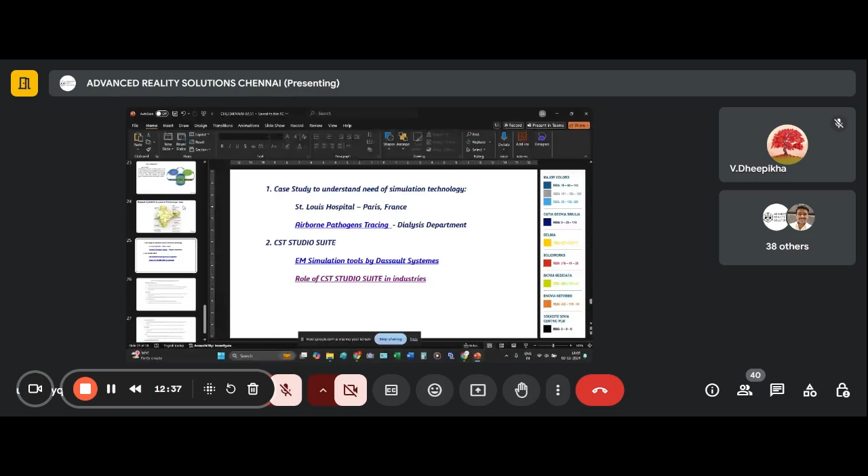Shall we proceed with the session, or shall we wait for some more participants to join? No, sir. We'll begin the session, sir. We'll start. Great, sir. I will share my screen now. Is my screen visible now? Yes, sir. Good to go. Great.

So like the Professor introduced, I am Syed Ibrahim from Advanced Reality Solutions. We work for Dassault Systèmes, which is located in France. The headquarters is in Paris. So this is what we are going to deal with: antenna design and electromagnetic simulations. In particular, we are going to address real world industry demands. It's my pleasure to join, and I will hide this.

Before we get started, let us see what these industrial revolutions are, because as the revolution changes, the technology moves forward to another level. We all have a little bit of knowledge on industrial revolutions: Industry 1.0, 2.0, and 3.0. 3.0 is the period where computers started to play their major part, where we started to have automated production as well as semiconductor electronics.

Industry 4.0 happened after the year 2000. Until 2020, there were numerous improvements in industrial revolution 4.0, where we have heard about lots of cyber systems, internet of things, industrial internet of things, encrypted platforms, cloud services, networking, and machine learning, which is a part of artificial intelligence, I would say, because another part is deep learning.

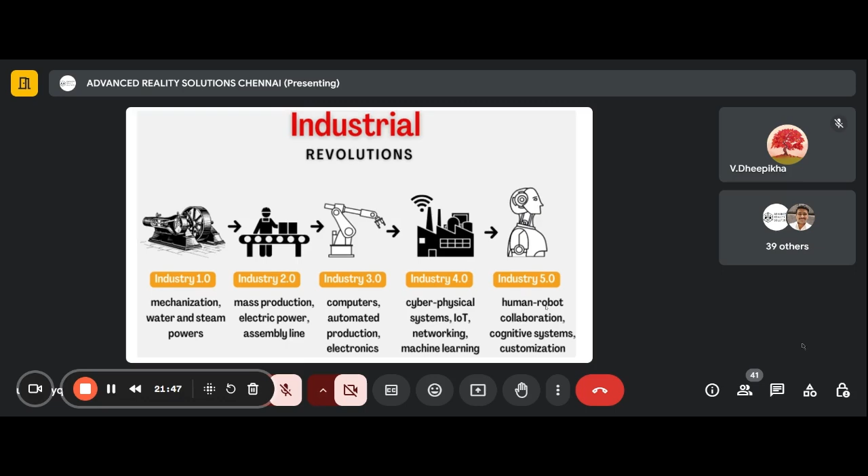5.0 is the collaboration of human and robot for all applications. Take your pick, any application, medical field, defense, production, teaching and learning, everywhere robots are there. So 5.0 is the future being planned by industry professionals, senior scientists, institutes, and senior professors. They are working towards achieving everything in line with the requirements of the Industry 5.0 revolution.

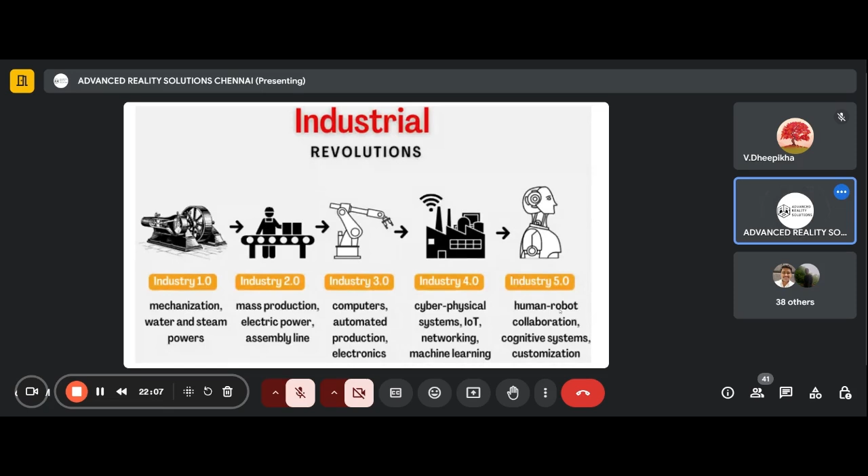It is going to be a short introduction about this company, Dassault Systèmes. Actually, they have numerous industrial clients, but their objective at the moment is to connect with institutions like yours, top-notch institutions, from where they could get people who are really handy with their software tools, because they supply some software to the industries, leading industries. I will show you what the industries are.

This is some basic information about Dassault Systèmes. It is located in Paris, Boston, and Shanghai. These are the headquarters for different parts of the world. They have 72 research and development laboratories and 180 3DS offices, which means the complete setup. You will come to know what is the meaning of this complete. I will show some of the slides so that you can understand.

This is how it has begun. In the year 1981, they started doing 3D designs. In 89, they started doing digital mock-up. And then product life cycle management came in the year 1999, that too for a car manufacturing company. In 2012, they launched the 3D experience platform completely, where you can virtually get into an environment and feel it.

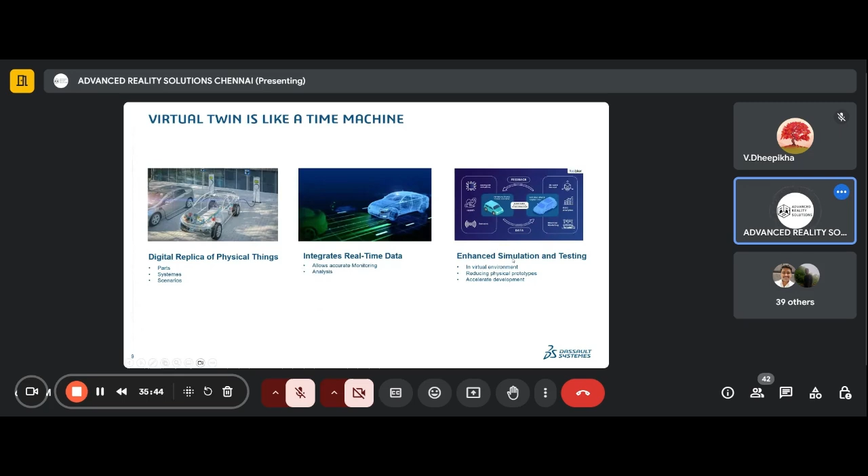Assume that I am designing an amplifier in which the transistor has got burnt. I'm going to replace it with a new one. Again, I will run the product execution. Again, some other part may burn. What is happening here? I am taking new hardware whenever required, which means I'm using the actual resource. So when you check the carbon footprint of such transistor manufacturing, it is some value. So I am avoiding everything. So I am driving sustainable practices by using simulations. That's what the meaning is.

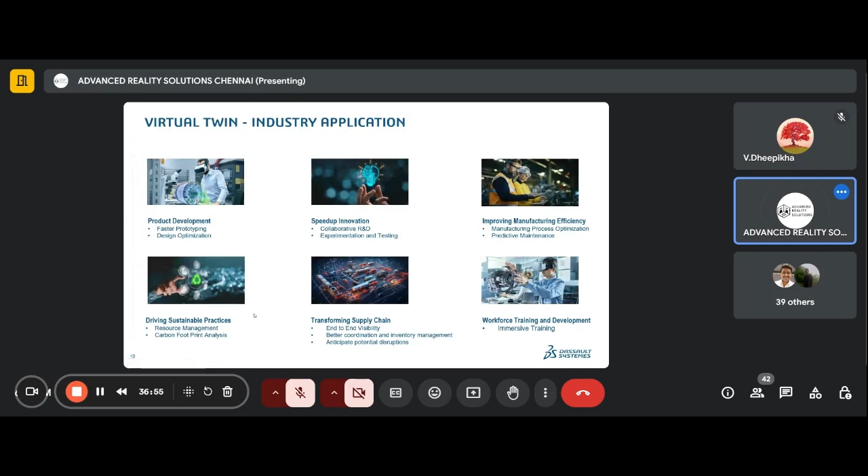How do I approach? Being the students of pre-final year, I hope you guys are from pre-final year or second year, the objective is to work towards your project, because that project will define you. Who are you at the end of 4 years of your program, or 3 years for lateral entries? After the completion of your degree, who are you? The industry will see you based on many aspects. Your project is one among that.

So before you even start working on your project, it doesn't have to be 100% hardware. It can be a simulation experiment also. Or you can make it 50-50 or 70-30. So your idea is important. Have a clear concept. Conceptualize your idea. Justify your idea. You cannot say that I am going to fold the entire electronics department into my pocket. No, it's not possible. When you think about something, you should have a valid justification for that.

You can say that I will design an oscillator which will resonate at so and so frequency, maybe 500 gigahertz, and the cost involved in the entire design is only 10,000 rupees. So this is something like a theoretical approach, but you should justify it. What kind of oscillator are you going to design? What about its biasing? What about its major elements? What about the feedback unit?

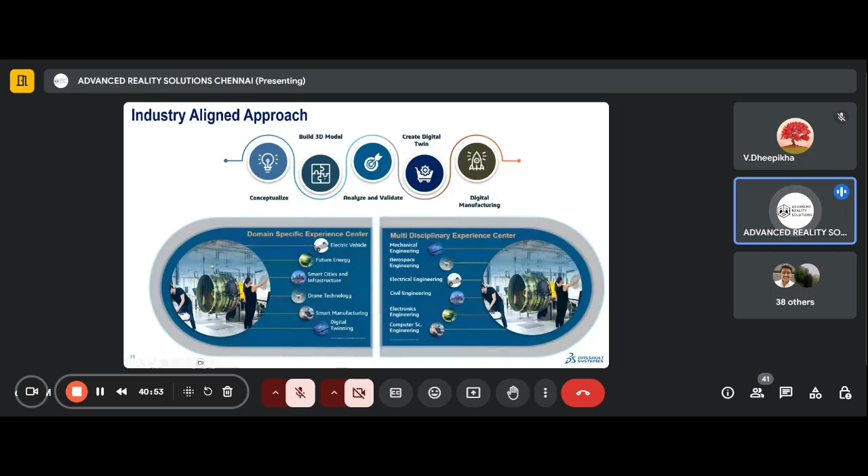Even you can test your product, you can create your product using simulation tools. Before going for hardware, you can have a final product in your computer as a module, like you see some pictures here. This is a 3D view. This is not actually hardware, this is someone else viewing this in 3D.

So what are all the tools available for this kind of process? We can start from the physical design. CATIA for the physical structure. You see the pictures on the right side. Here a PCB is also shown.

Basically, CATIA is a design tool, a computer aided design tool. It is a 3D CAD tool with which you can design all your hardwares. You see, this is for civil engineering, and this is for us electronics people, for automobile students, some other department, instrumentation people, mechanical guy. For all department students, wherever physical structuring is involved, we can use CATIA.

GeoVia is a very useful tool for people who are designing and working on everything related to mines, maybe gold mine, coal mine, whatever. This is even useful in the construction of dams as well. So that is another tool.

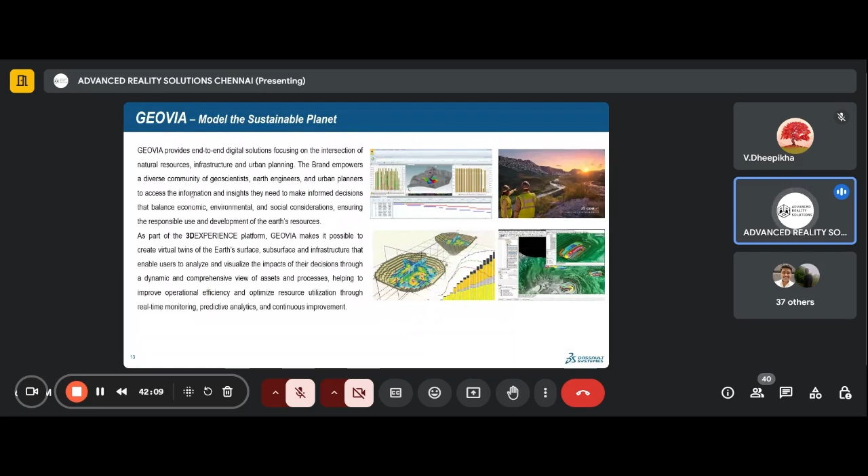Simulia has two divisions. One is Abaqus, the other one is CST Studio Suite. I will explain later, so keep this in mind. The tool that we are going to deal with, CST, is one of the members of this Simulia family. All right, keep this in mind.

Delmia is for, you see, here we talked about digital manufacturing. So Delmia is for digital manufacturing. You can literally bring your industry inside the computer. How is my industry going to be? I'll be having this thing here and this thing there, and my manufacturing will happen like this. Everything shall be designed using this Delmia.

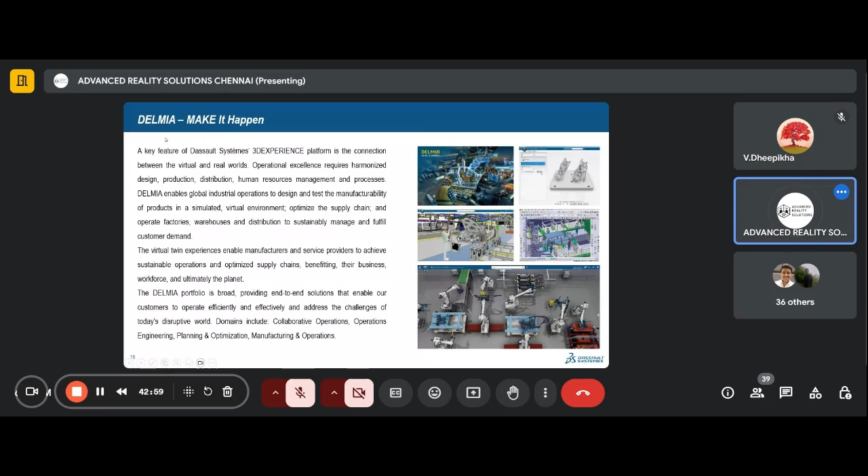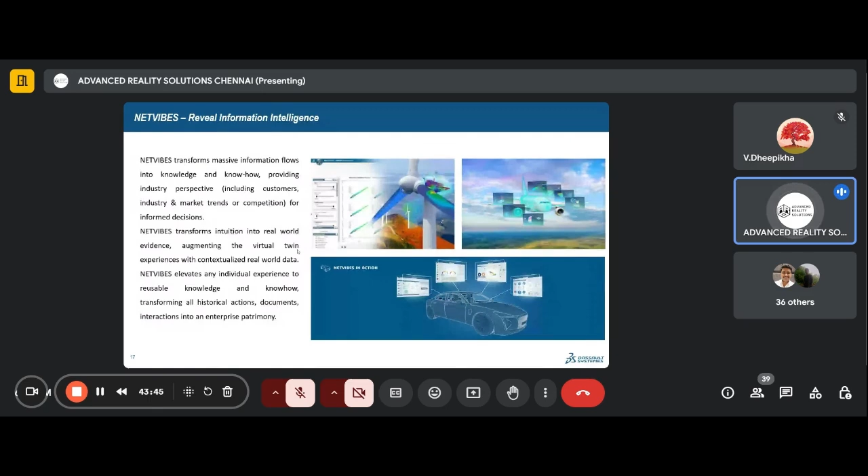NetVibes is something related with sales and other marketing perspectives. This is also available with Dassault Systèmes. So these are all simulation tools, I mean Enovia. Enovia is a platform on which all other tools work.

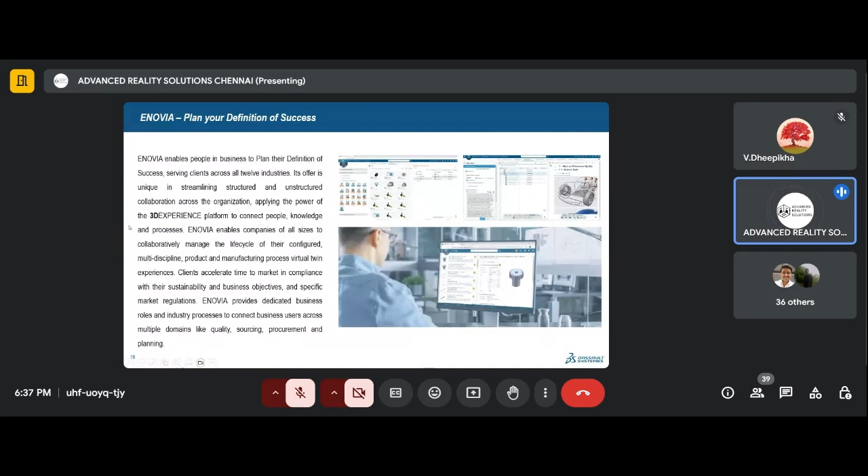Assume that you have an Android phone with you. You may have WhatsApp, Facebook, or some other payment application. These applications are like individual tools, like 3DVIA, DELMIA, Simulia. These tools are like individual applications, and Enovia is your Android OS. So for Dassault Systèmes tools to work, we need Enovia. Enovia is a platform on which all other tools run.

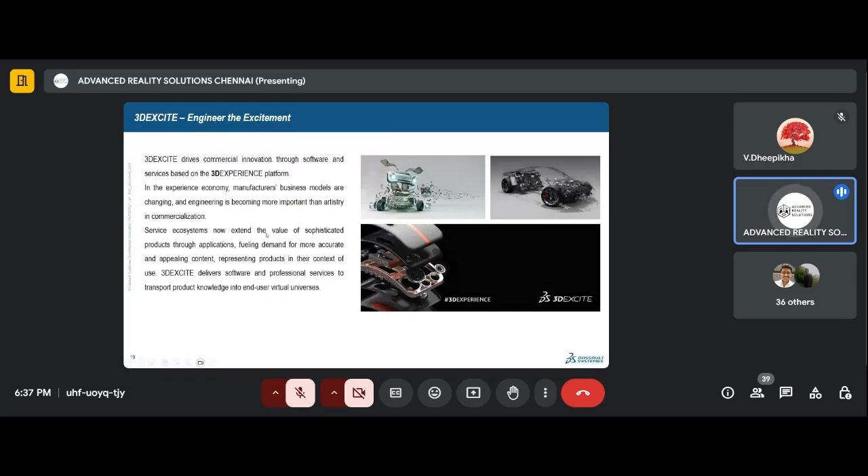3DEXCITE is for special appearance only, but this is pretty different from 3DVIA. These are all business models. You would have seen some advertisements with lightning strokes and thunderstorms, some visual effects. I hope you can understand. So for that also we have a tool to enhance the appearance of our product.

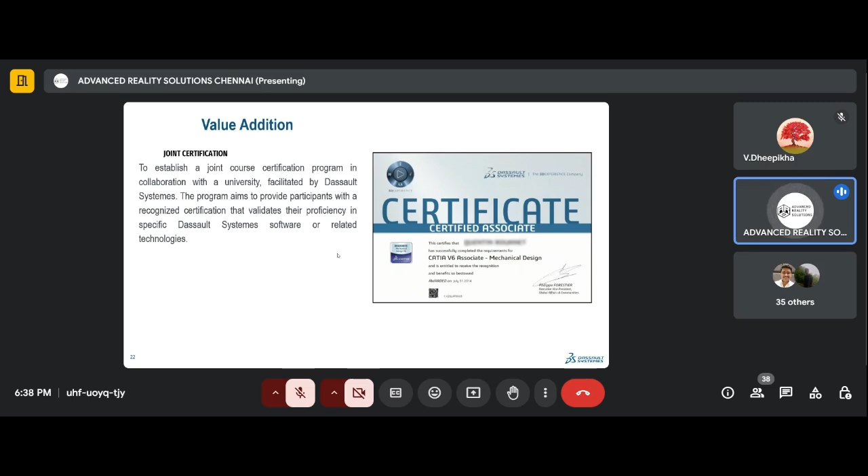You can have joint certifications. You can sign up for some specific module and get yourself certified by Dassault Systèmes, which will increase your appearance across the recruiters. Since you're students, I'm talking about recruitment. Once you have a valid certification from Dassault Systèmes or its technical partners like us, requirement of industries can be fulfilled very easily. I mean, people will start looking for you.

How does it happen? Actually, this is what we are doing in your college, because your college is one of the hubs of information, hubs of knowledge, we would say. We try to connect with your institution and talk with the senior people, professors, and they organize events like this. We are planning for some hands-on trainings also in person.

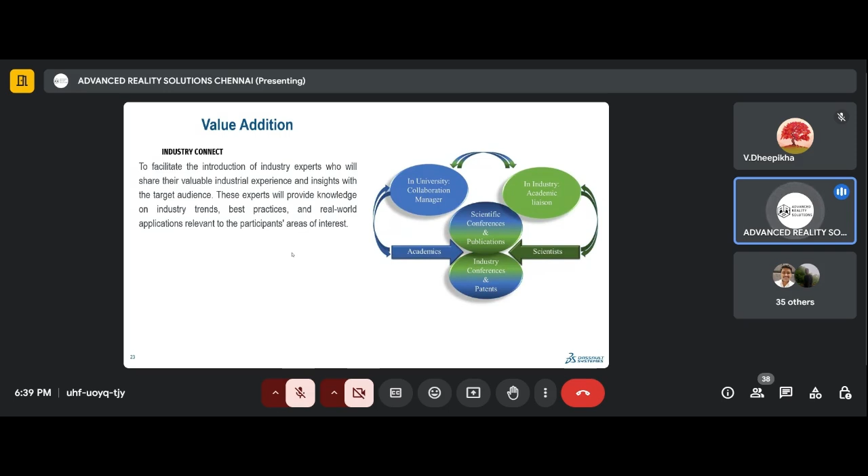We will visit your place in person and deliver some hands-on training to enrich your practical experience, because you can have a different set of laboratories at your institution, and senior professors are there to teach you, but what's missing is what's happening with the industry actually. That is what's missing. So we would bring some examples of industry's problems, current industry demands, with some solutions. We will teach you. That is also possible with us, and we are planning for that also.

And I would like to give you some examples, first a case study to understand the need of simulation. This was taken at Saint-Louis Hospital located in Paris, France. Airborne pathogens means some kind of germs or unwanted particles - how do they trace them? This happened at one of the dialysis departments in that hospital. I will show you.

I hope you can see the screen. Can you see the screen? Yes sir, we can. I am not sure about the audio of this particular clip, but still you can understand without the audio. I'll play it now.

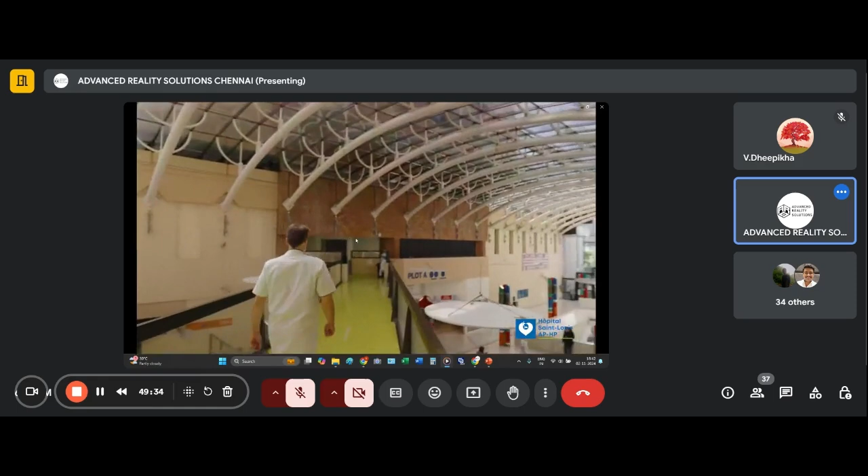Educational tool - we have been able to reveal the invisible.

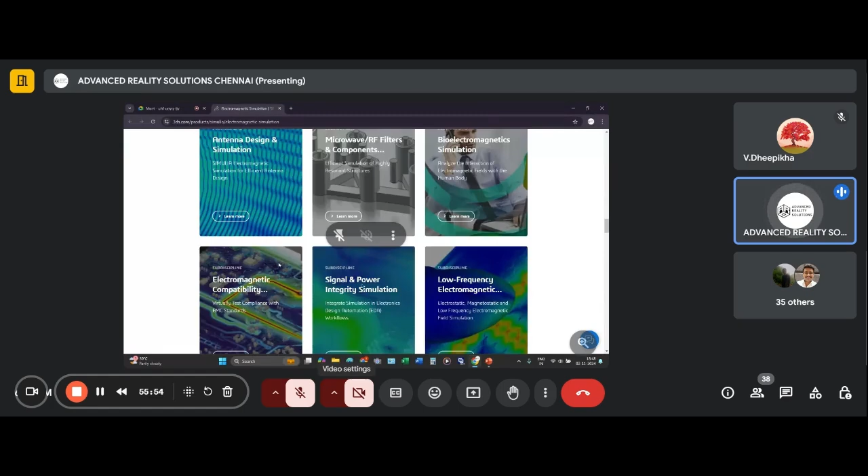Simulia's simulation tools. And what are the different tools available? You can see CST Studio Suite. To get started, we have CST Studio Suite, in which we have nearly 25 different modules. I will show them all now.

Opera, Antenna Magus for exclusive antenna design, like array of antennas design, WASP-NET, FEST 3D, Spark 3D, and IDEM. So these are all the different software products, electromagnetic software products for electromagnetic simulations.

Okay, so we'll start with CST Studio Suite. So role of CST Studio Suite in industries. Before we talk about role, I will show you what are all the tools available in CST.

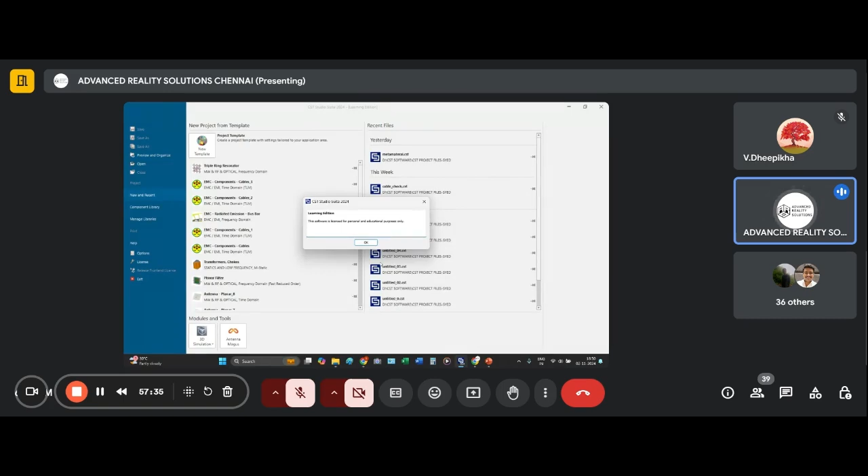In parallel, I will just open this software also so that you can understand. I have this basic version installed in my computer. I have the latest version 2024. This is S2, which was launched in August 2024, possibly the second half, around 18th or 20th of August 2024. I have worked on few examples.

When I try to open this, I'll be asked which part of the CST software I am going to work on. You can see there is a compass which shows different verticals.

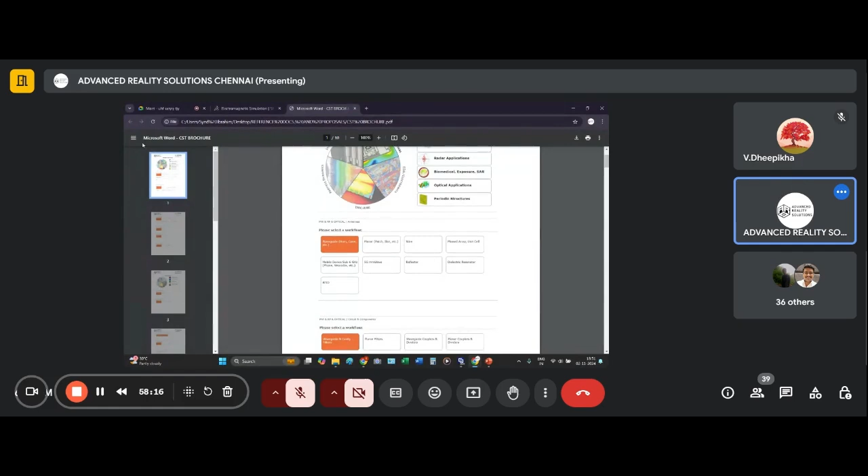If I click microwave and RF, I see these many options. That's what I've shown here. See, under microwave and RF, I have 6 modules. The first one is... Is it visible? Can you read the document? Yes, sir.

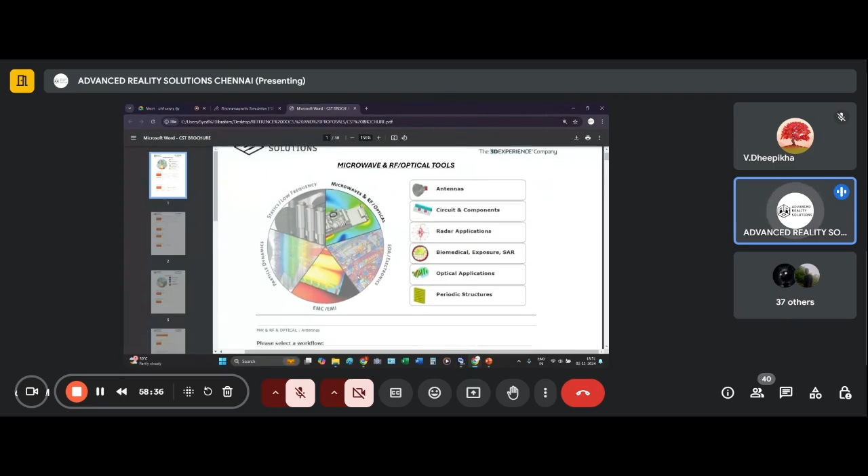You have, see, microwaves and RF slash optical, 6 submodules are there. When I try to open the antenna module, there are different types of antennas: planar, wired, phased, reflector type, resonator type, wearable antennas - everything is available.

Possibly today, if time permits, we will start with patch antenna design. And when time permits, and if we could get some future sessions, your professor Gulam sir and Maruti madam are working fine. We are working very closely to give you more hands-on. So we are working on it.

We'll start designing this patch antenna today, which is used in our mobile phones. I will tell you how to do that. Maybe later today, or we'll continue in the next session, on Monday the 4th of this month. So this is under antenna.

When I see circuit and component, these are the submodules available. I can work on all these things. See, filters, waveguide couplers and dividers, coaxial connectors, lots of stuff are there. And when I open radar application, see, these are all inbuilt.

Under biomedical, see, what is this? Biomedical exposure, SAR. And optical applications, dielectric structures and plasmonic or metallic structures, periodic structures. So these are all the different modules, you see.

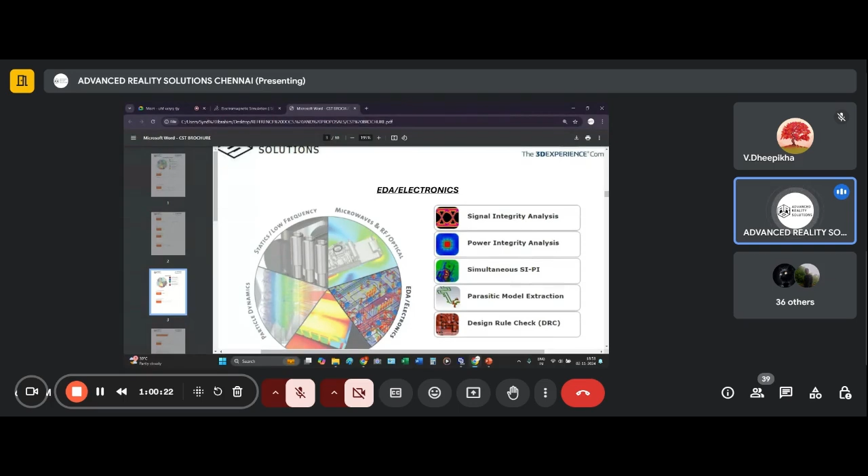So this is under EDA slash electronics, the second module in the compass or pie chart, whatever. Submodules are there, you can see. So you can count this. I'll do it in the software itself.

If I open microwave and RF slash optical, there are 6 modules, keep in mind. And here we have 5, 6 plus 5 is 11, another 6, 11 plus 6 is 17, 21, 27. So we have 27 submodules. All right, so if you have knowledge on all the modules, it's good.

Or you can focus on a particular one. Sir, I am planning to have very good knowledge on antennas. Yes, go ahead. Your college has the software, and we are trying to expand it. We will support you.

Technically, your professors and I will support. No, sir, I'm thinking about biomedical exposure. Okay, go ahead. So you have a focus. Where are you going to work?

So when you talk about antennas, you should know who are all using CST Studio Suite for antenna design. Which company is using? You can take your mobile and straight away you can search list of companies using CST Studio Suite for antenna design. You will see top-notch companies. Even you can do it parallelly. Lots of companies, top companies are using.

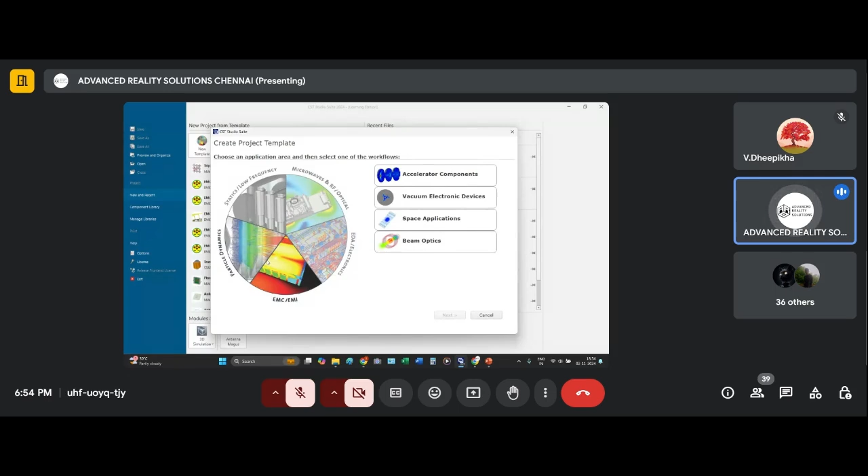Syed sir, sorry for the interruption. Tell me, sir. You want to go for a break? You asked me for a break. Yes, sir. Shall I take a break for about 5 to 10 minutes, sir? Is that okay? Yes, sir. No problem. You can go ahead, sir. Great. Okay. We can resume by 7:10. Is that okay for you? Great, sir. That would really help me. So, Dheepikha, please announce that we'll break now.

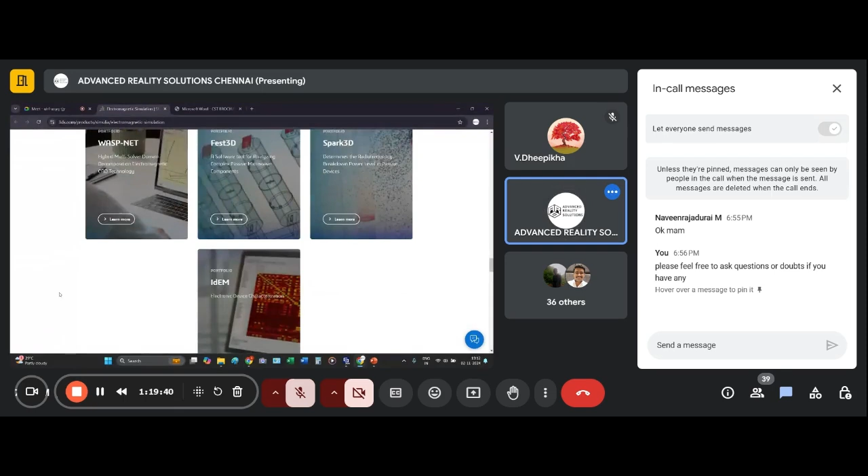Now, I wanted to show you. I will introduce once again the tools for electromagnetic simulations. CST Studio Suite, if you want, you can make a note of it. Opera, Antenna Magus, WASP-NET, FEST3D, SPARK3D, and IdEM. These are all the different simulation softwares available for electromagnetic studies, under which we will exclusively discuss CST Studio Suite.

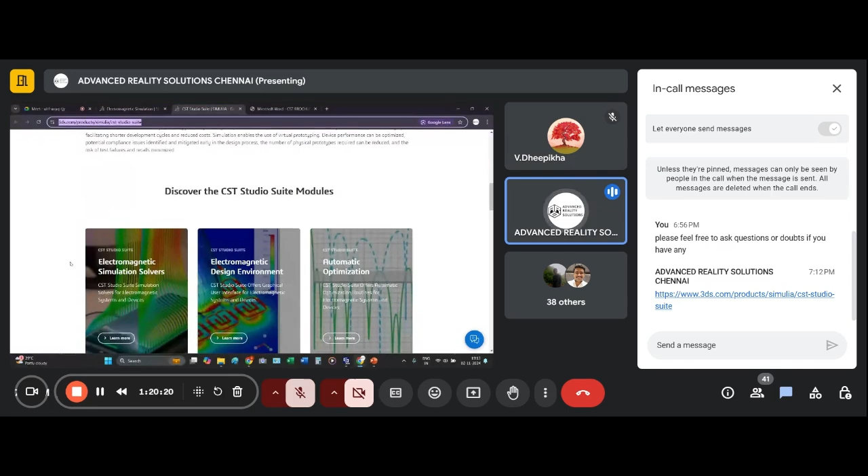You can see all basic information is available on the official website itself. I will just share this link on the chat section of today's meeting. There it is, I already shared. So you can check all the basic information about CST Studio Suite and what is included in it. Electromagnetic solvers. These solvers are very important because whatever input we give, they convert it into an equivalent form which is understandable by the software.

So we may be entering numbers literally. Assume you are designing an antenna: we would define the length and width in terms of x and y axis, also the thickness in terms of z axis parameters, but the same will be converted into some other form which is understandable by the software.

So it depends on the type of simulation that we select. I will give you an example here: whether it is time domain based or frequency domain based, which type of result do we expect? I am designing a system and I am going to have a clear view on it. What kind of response are we expecting, time domain or frequency domain? So that is depending on our choice.

So such solvers are included. Design environment is there, which means you can select different categories. You can test a particular circuit under different constraints. Like I would like to recall one of the basics of electronics, which we call electron ballistics. Based on this electron ballistics only, the entire electronics engineering is running, that we all know. But still, I wanted to recall.

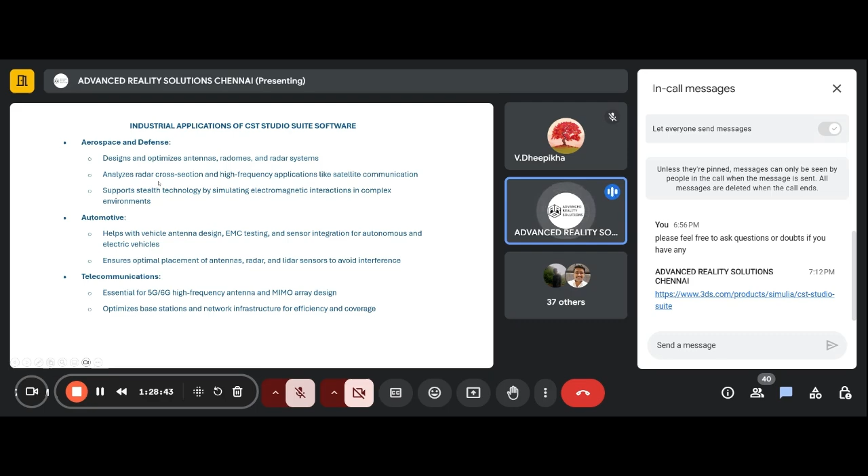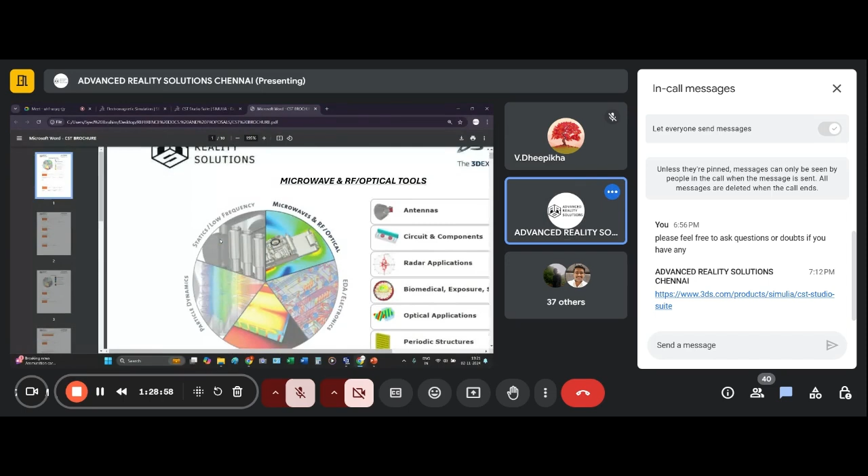If you are good at CST Studio Suite, possibly in radar, you have that radar module also. I will show you. Sorry, it is actually here. See, under microwave and RF optical tools, you have radar applications. You can select a particular module and start working on it, and you can become an expert in that. It is not necessary for you to understand everything in this CST software. You can choose just one. Under microwave, you choose radar application, and there are these many workflows available. You start learning one by one. That is enough. You can go to small objects, large objects. Lots of submodules are there.

When we are talking about the applications, for radar, aerospace and defense is using CST Studio Suite with respect to antenna design and radar. So you can plan your activity. You can start working on some concepts related to this and develop a project. Either you work for antenna field or radar. Take your pick. It is your choice. Or, sir, I'm trying to work on automotive. Yes, you can go ahead with EMC testing. That is also possible. I will show you.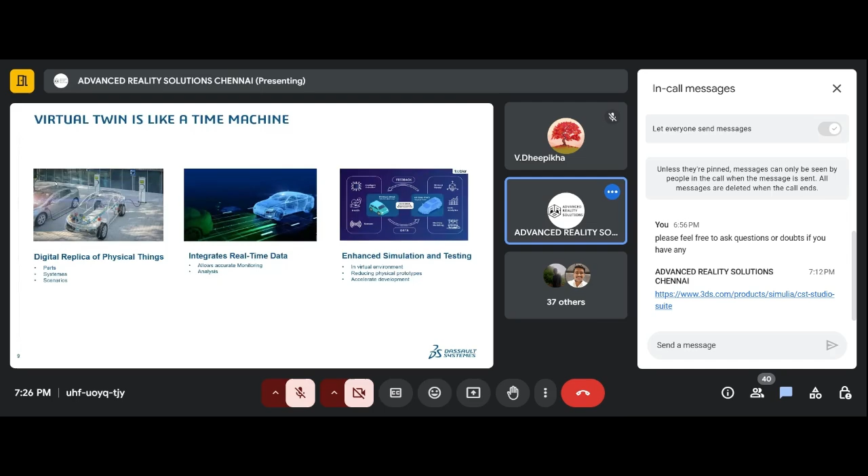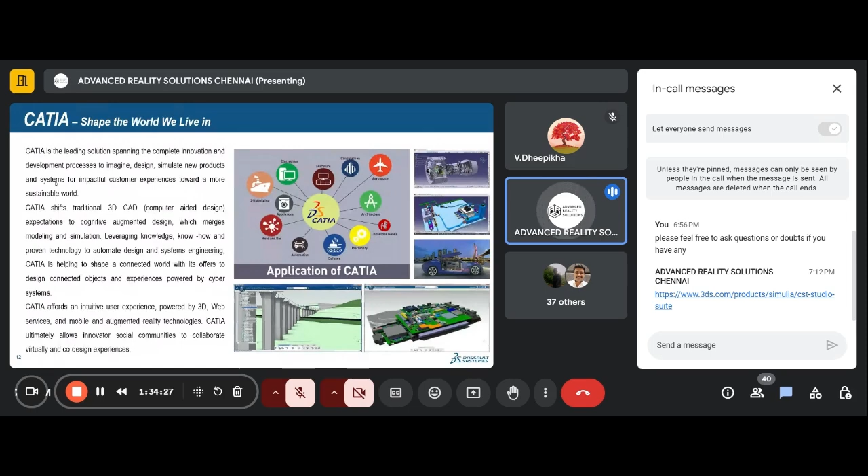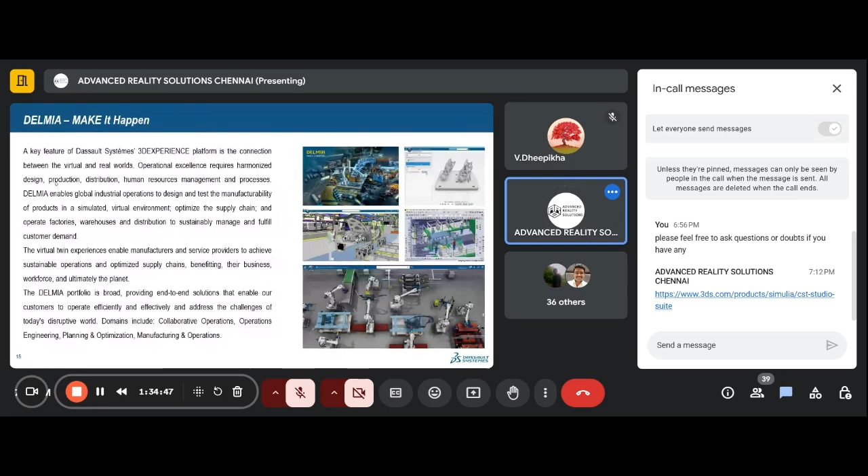This is for mechanical design, okay, physical structure design. It does not have anything to do with the electromagnetic or electrical properties of our system. Though there are some electrical sections in this, generally CATIA is for mechanical design, GeoVia for mines and other civil infrastructures. Simulia has two members. One is Abaqus, that is for civil and mechanical engineers, and the other one is CST, I mean electromagnetic simulation. Delmia for digital manufacturing. 3DVIA is for additional fine tuning of the physical appearance.

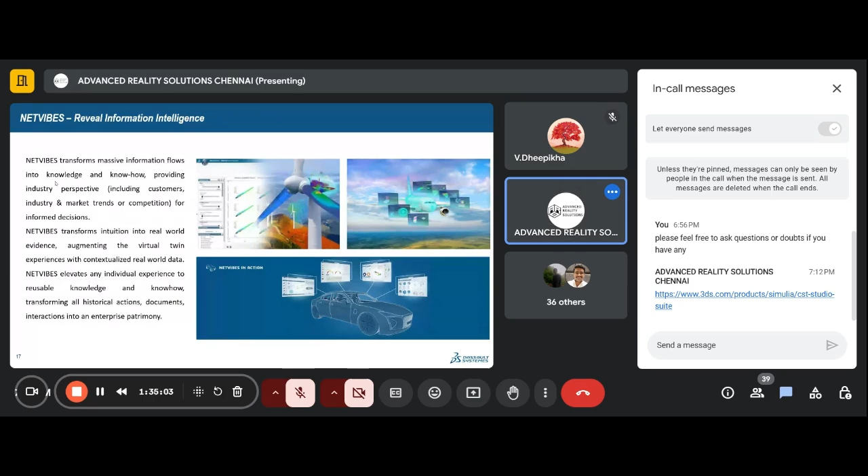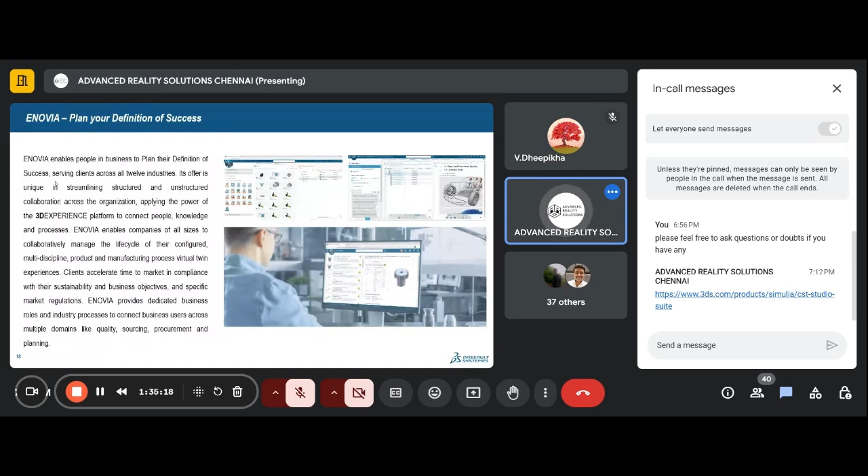NetVibes is related to marketing and other trends related with sales. ENOVIA is a platform on which other tools run, like CATIA, Delmia; all other Dassault Systèmes products run on ENOVIA. 3D Excite is the additional exciting appearance for our designed product. BioVia is for biomedical people, where there will be inbuilt chemical formulae and combinations. So they can combine them together and form a new drug also. Okay.

So for understanding, I will show you BioVia also. Give me like 2 minutes. Right now, I will show you this. It is here, you can see. This is an interesting thing because you must know what this is. You have some role to play in this biomedical field also. So I will share the link of this also. When time permits, you can have a quick look at this. This is for BioVia. I'll tell you what is in this.

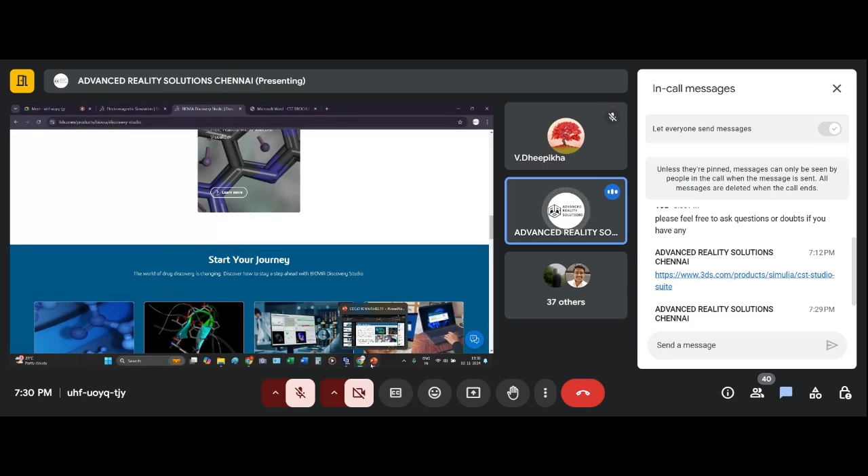See, these are the modules in it. BioVia Discovery. We'll go with BioVia Discovery, under which we have simulation, structure-based design. See, these many modules are inbuilt with BioVia. So for understanding, I'm showing this. We'll run this again.

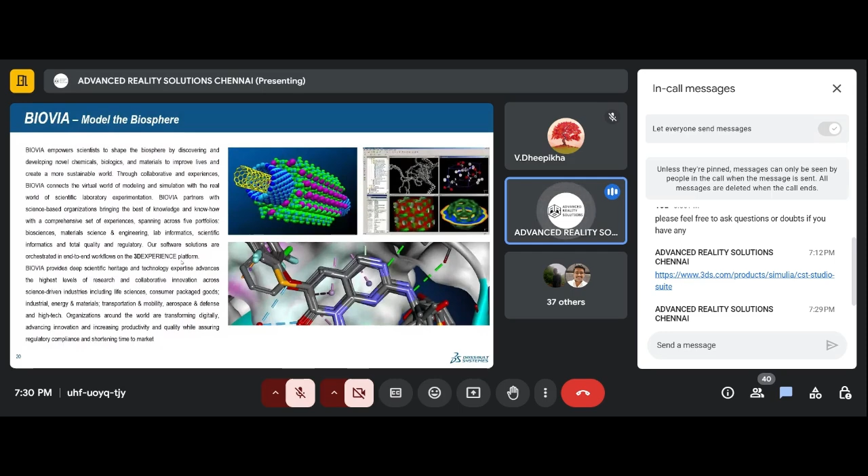I've shared the link for BioVia also, since it played a very important role during the discovery of the corona vaccine. You may have to understand what this is, because we are engineers. So Medidata is the module in which the medical information is stored, the clinical data are stored.

This is what Dassault Systèmes does. They provide joint certification. They are good at industry connects, just like what we are doing now. This is an online session though, but we do provide hands-on in person also. The objective of Dassault Systèmes is to bring out the best of the institution.

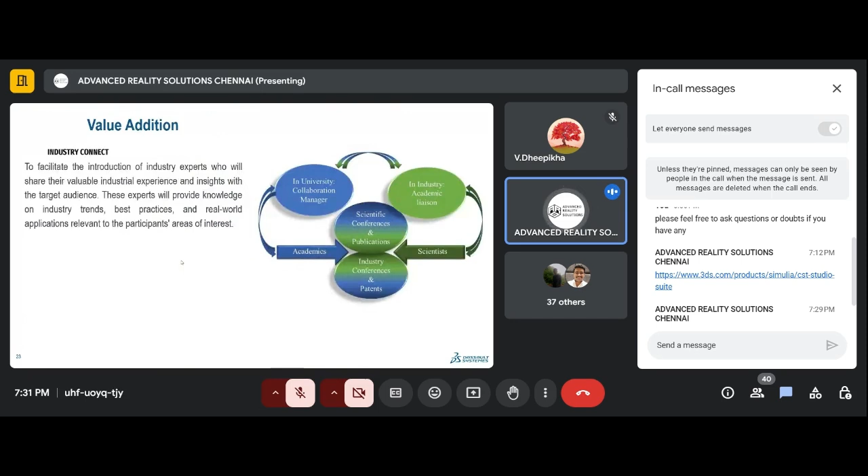So maybe there are 50 participants now. Few of you may be very good at antenna design, and few of you may be good at radar. You know what I mean? So we need effective people. Dassault Systèmes products, successful partnership. Few examples we have seen.

This is where we are now. I hope things are clear until now. I will summarize one more time. I have introduced you to the need of simulation for today's industrial trend. For that, we understood what the industrial revolutions are so far. Okay, we are here. We are at industrial revolution 4.0.

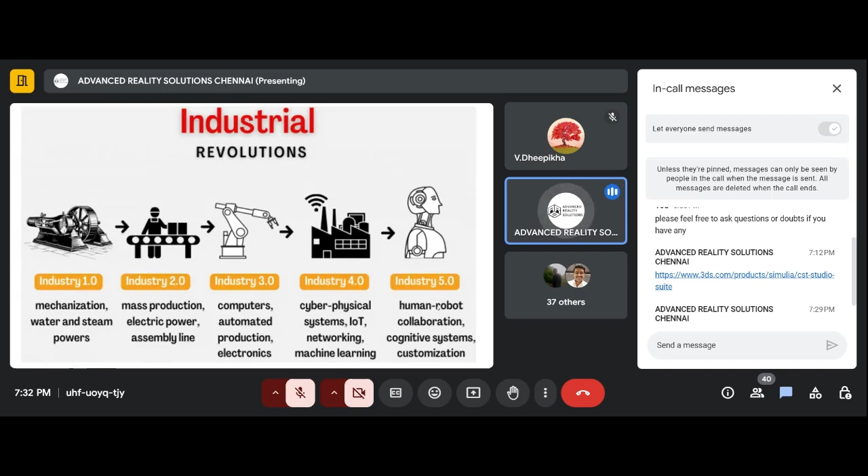And for 5.0, we'll be collaborating with robots, for which we need high encryption standards, which we are already working on. For that also, we need simulation, because with simulation we can develop a perfect product. Particularly, we will discuss electromagnetic simulation. That is the objective of this event, which is being organized by your department.

That is for now. If you have any queries, you can ask me now. Otherwise, we will move on to antenna design. Please ask me if you have any questions. Sir, I have a doubt. Yes, please. Is the software completely free, or do we need to pay a certain amount to obtain a certain feature? And can you please introduce yourself? May I know who's this? I'm Jayaprasad from King's College of Engineering, Punalkulam. I'm currently pursuing final year. Okay.

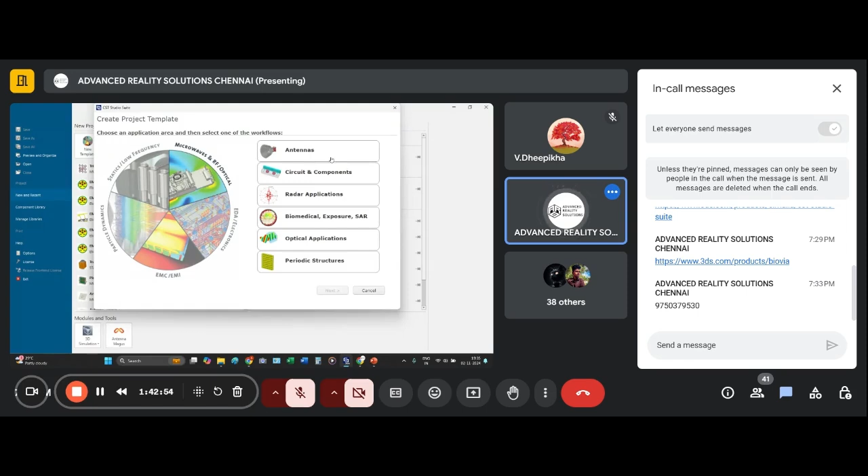I hope you can see the screen. Is it visible? Yes. So now we are going to discuss antenna design. This is my software, CST Studio Suite. I will open it to show you an antenna. Next. There are lots of types of antennas, but I am going to talk about the patch antenna. As you can see, this is used in our mobile phones.

Next, what kind of response do I expect? I will choose time domain response. And these are the basic units. Default units are good; you see the dimensions are in mm. I'm good with this. Select minimum and maximum frequency. If I am designing my antenna's frequency, let us say 5 gigahertz, my antenna's frequency is inside this range, so I can have the response from 1 gigahertz to 10 gigahertz. How does my antenna behave?

Having started, I don't want to see any of this. So this is what I'm going to do. You can see this is a patch antenna, which has a ground and a patch layer. In between, I have a dielectric. Dielectric, we know, is an insulator; it does not conduct. As a whole, this arrangement is like a capacitor, but it's not actually a capacitor. So you have different parts: patch, dielectric, ground. We have one more part. You see this part. Can you see the cursor, students?

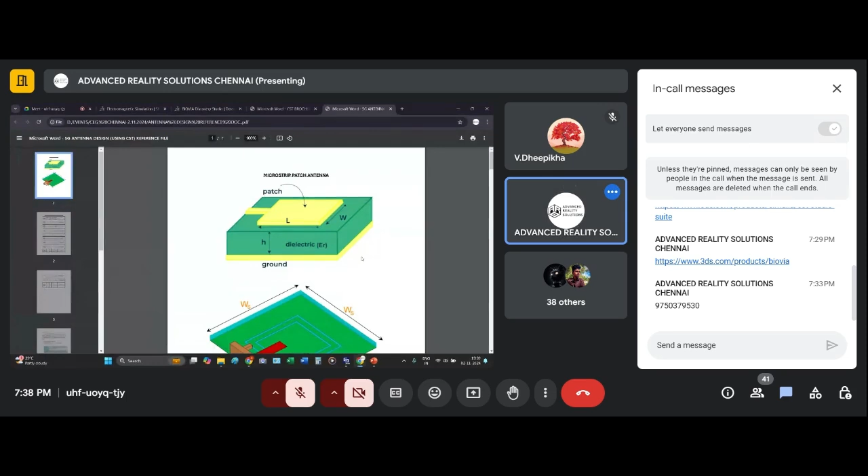If I am dealing with some RF signals, then I may have to deal with frequencies of a few megahertz till a few gigahertz. So the megahertz to gigahertz band I have to deal with if I am talking about RF antennas. For example, sir, I want to design an antenna. Okay, you are going to design an antenna. Where are you going to use it? So your application is first priority, for which I have a chart.

You see applications here: consumer electronics, high frequency design, space and defense. For every application, you have a particular frequency value. Can you see? So these are all frequency levels for the concerned applications. Fine, sir. You are saying that for low cost antennas up to 2 gigahertz there is a frequency level. Then what else do you have to see? First thing, application, and you decide your frequency.

Step 2. Step 3, you see a dielectric here. You have to select this material. That is important. That is given here. You see substrate. For 2 gigahertz, you can either select FR4 or Rogers, because you see 1 gigahertz to 100 gigahertz also this is applicable. Up to 2 gigahertz, FR4 is applicable. So if I am designing an antenna at 1.5 gigahertz, should I go for FR4 or Rogers? Which one do I take?

Both are having the same frequency. Both are going to transmit and receive signals. Another important factor is this loss tangent. My dear, keep in mind, though you are working on 1.5 gigahertz, consider this loss tangent. So for FR4, the loss tangent is between 0.02 and 0.03. But for Rogers, it is 0.0009.

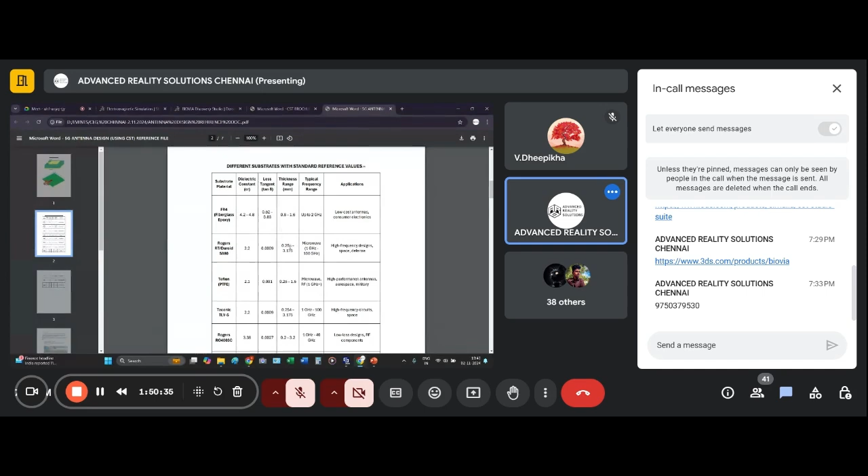Did you get the point? Should I repeat? Students?

Resonating frequency. Sir, my antenna is resonating at 10 gigahertz. I designed it for 15 gigahertz, sir, but my antenna is resonating at 10 gigahertz. What is the meaning? The antenna's efficiency is very good at 10 gigahertz, and if you try to send a signal at 15 gigahertz, it will not work properly.

Then how is the antenna efficiency determined? How do you determine the efficiency of an antenna? Actually, there are lots of calculations, but for understanding, I will tell you this. Assume you are transmitting a signal at 15 gigahertz. It is not sent properly - you have some disturbance at the receiver side, and the sender side, my antenna is not sending the signal properly. But the same antenna, if you send a signal at 10 gigahertz instead of 15 gigahertz, it sends very well. What is the meaning? The actual signal transmitted is delivered to the receiver properly without any disturbance. That means your antenna is doing its job properly.

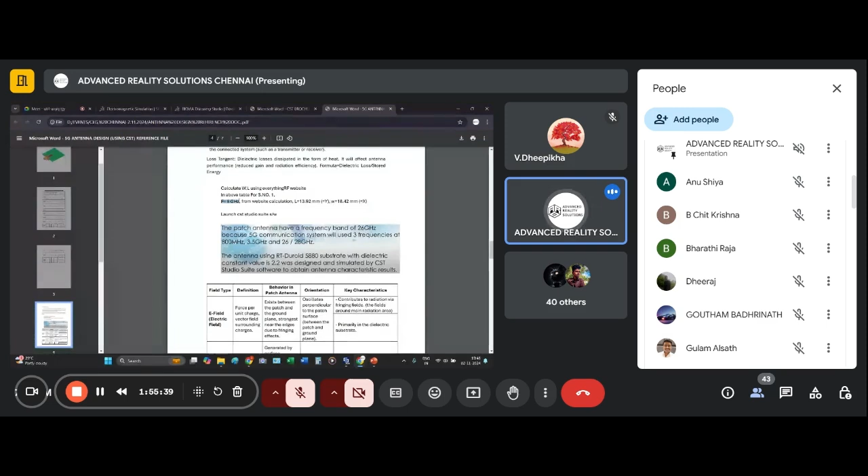Now what do I know? I know my frequency is 5 gigahertz. I have chosen 5 gigahertz frequency, and I have selected this material. Though it goes up to 2 gigahertz, for understanding, I am just starting from this material. My frequency is 5 gigahertz, my material is FR4. I know the loss tangent value and the dielectric constant.

This table is generally available on the internet and in textbooks also, so you don't have to worry. I will share this information with Professor Gulam sir, you can take it for future reference. I am using these values - my frequency, except the frequency. Here it is 2, I can go with 2 also.

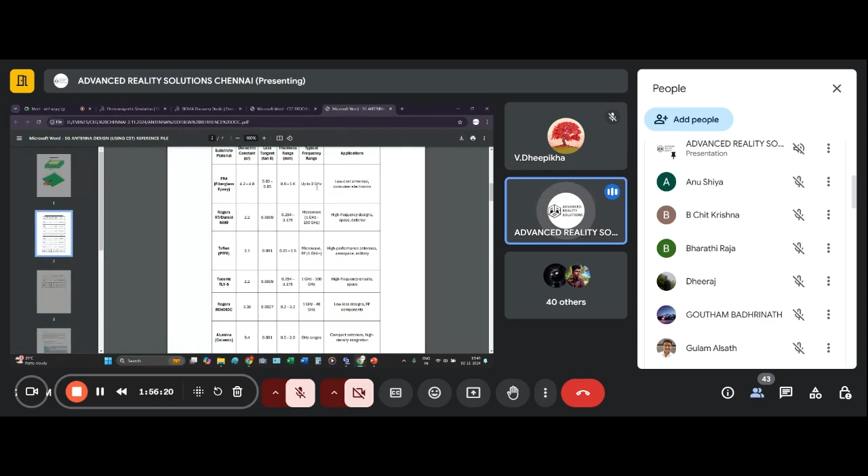Once I know these values, I go to 'Everything RF', just press enter. The first website - go inside. You see RF calculators here. Click it.

Many calculations are there. There you go to antenna calculator. You see, we are designing a patch antenna, microstrip patch antenna. So click it.

Dielectric constant - what is the dielectric constant value? I selected this one, so this is from 4.2 to 4.8. Which value can we take? I will take 4.3, for example.

What is the height? Height is the thickness, okay. Thickness is height, H, 0.8 to 1.6. I will take 1.6, for example. Or you can take 1.4 also.

What is my frequency? 5 gigahertz. Now look at this, here you have the value. This is in meters and this is in mm.

We take the dimensions in mm. That is easier, because it is a very small unit. If you take in meters, then you may get confused - 0.01 or 0.10 or 0.001, such confusions may occur.

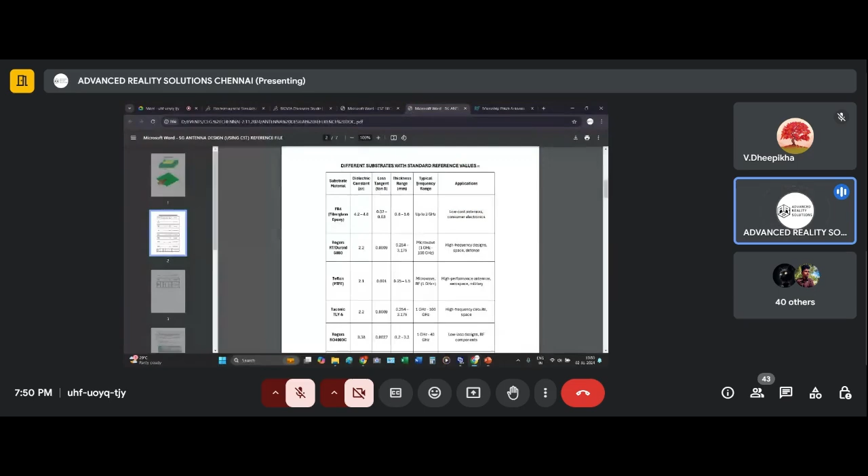So now just make a note of these values, width and length. That's what I did here. Width and length is noted. Length is 13.92, width is 18.42. Okay, I just noted.

Then I start designing the antenna. Go to CST Studio Suite.

Go to microwave RF optical antennas, patch antenna.

I will go with time domain analysis. All units are basics, let it be. I want to see the response of my antenna.

My antenna's frequency is 5 gigahertz, but I want to see its response over a particular range of frequencies. So you can go 5 gigahertz and less than that, that means you can start from 1 gigahertz, and after 5 it's 10. Around between 1 and 10 gigahertz, how is my antenna going to behave?

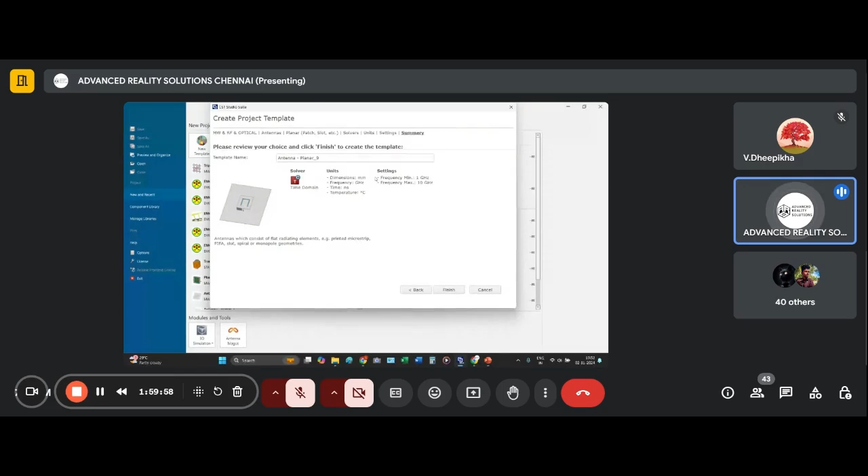And you see, this is the summary of my selection. And I will click finish. Now I will get the template.

Okay, how it looks like.

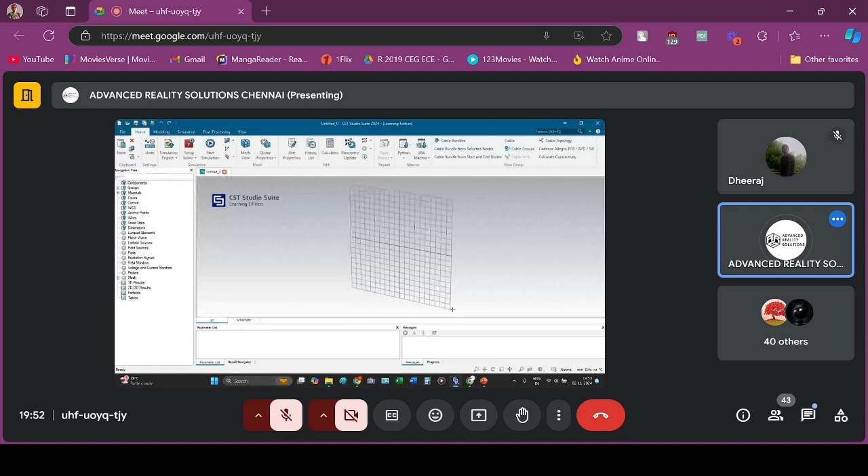Before we start designing the antenna, I will tell you how to use this software, so that when we proceed, it will be very easy for you. So far, you have seen how to get started with the antenna design, and what are all the preliminary definitions and values you should keep in mind.

Now you have a basic idea about antenna, and to start this, you see lots of tools are available across this window. Whatever you create will be available on the left. You see the left side components. Whatever you create, you can just move this - click and move, it moves.

If you want to change the view, then over here you can see - select view perspective, 0, 1, 2, 3, many. These are our keyboard values.

Now I will press 5, you see the appearance, it changes. 4, 3, 2, 0 - for different numbers, it changes its position. Or you can simply click and rotate. Okay, fine, let it be like this.

Any design parameters that we prefer to enter, we go to modeling and then do it. In modeling only the physical structure and other properties are loaded. Here you can have brick for creating box, sphere, cone, everything is here. So for antenna, we are going to use the brick only.

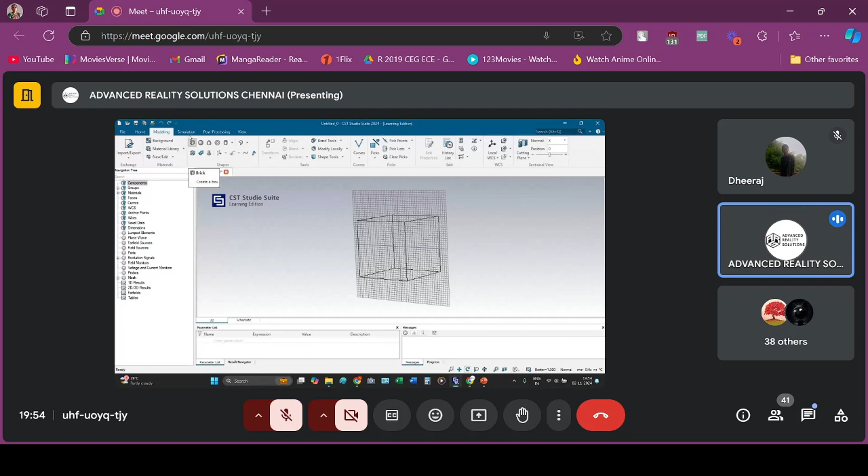Once we are done with that, we go to the simulation section and define the frequency of our antenna. Once again, it is already there - you see, I entered 1 and 10 already while initiating this design. Otherwise, here also I can change it.

Actual appearance - how do you want this to be seen? These are some of the important things that you need to know.

And once you are done with all the design, look at this - start simulation. If you click there, then the parameters that you have loaded already will be evaluated by the CST software. And then if there are any errors, you will get the message over here on the bottom right.

Now, whatever parameter that you enter will be available here. You see the parameter list, it will be available. For example, I will include only one.

Now, this is the opening screen of the software. After I give some basic inputs, now I am going to design. I am going to box - for this, I use this figure.

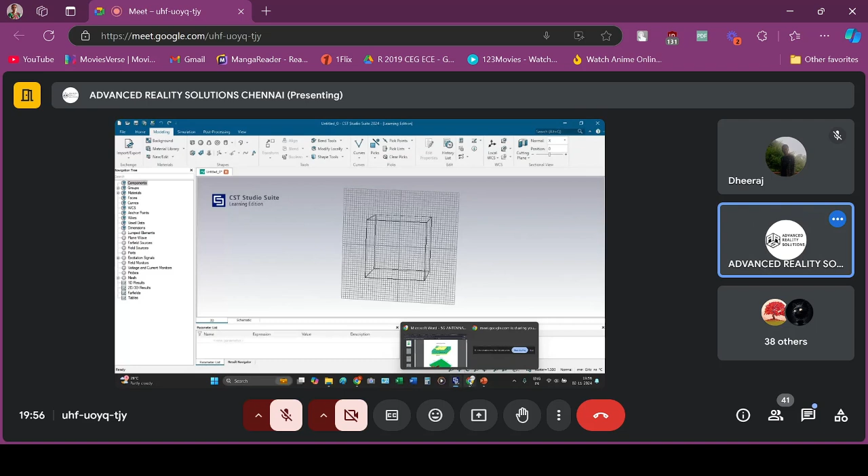I will keep this figure in mind. First, I have to place a ground layer. Ground layer is a metal, and I am going to place it. For which I need the ground layer's dimension. I want the ground layer dimension, but I don't have it now. But I have the patch dimension, calculated from here based on the technical properties.

I should design a patch having width of 18.42 mm and length of 13.92 mm. This is the strict value, you can see patch value here. But have a look at this ground, it is bigger than the patch.

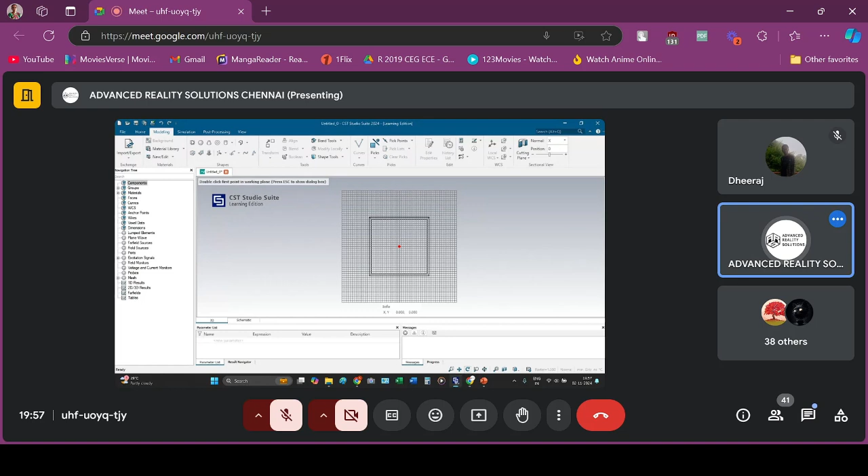So I can take some other bigger value compared to this one. If the width of patch is 18.42, I will take width of ground as maybe 24 or 26. Look at this X value. X means width. Here I am trying to draw a ground layer using brick.

I should click once, click somewhere in the box and press escape. I am going to make the ground layer. I told you X stands for width. Now actual patch width is 18.42. It should be higher than that for ground, higher than this value.

18.42 is the design value, so I will take 22. I can take 24 also, no problem, but something reasonably higher than 18.42. Now I will do X minimum. What is X minimum? I prefer 22, so minimum value, I put minus 22 by 2.

Here plus 22 by 2. Sir, why instead of 22 by 2, since I know 22 by 2 is 11, why don't you put 11? It's a good question, but for understanding I am doing this. Why did I put 11? I should keep in mind, because there will be lots of values during the design. You will be entering too many values. You don't have to get stuck or lost somewhere, so I am doing this for reference, storing and typing the value here also.

For ground design, I select some higher value. Similarly, Y value is 13.9, that is length. I will select 18, so 13.92 is the limit. I will select minus 18 by 2 and plus 18 by 2. This is X and Y values.

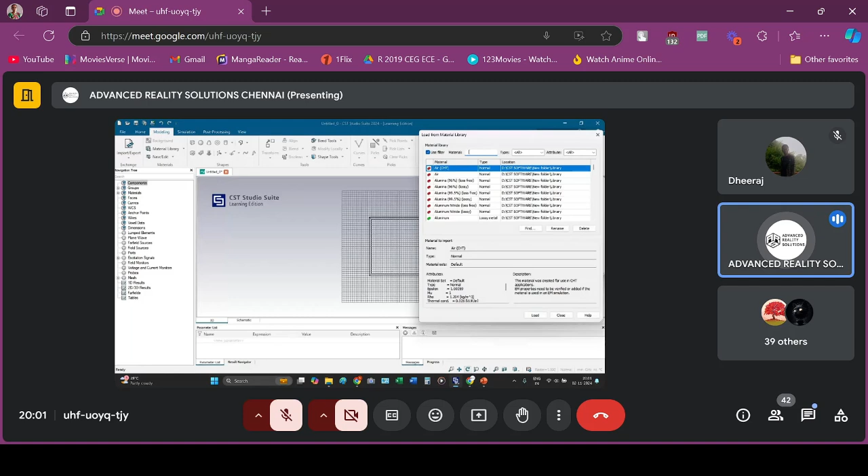See, copper is not available here, so I load it from the material library. There are many materials available, I don't have to search one by one, so I will type copper. There are two types of copper materials available, I will select copper annealed. Annealed copper is better than the pure one, because annealed copper materials are subjected to gradual heating until a value lesser than its melting point, and then gradually cooled.

For example, if copper has some 500 degrees Celsius of melting point, then the material is heated up to 300 to 350 degrees Celsius and then gradually cooled down. So doing this will strengthen the material first physically, and then it will have improved chemical properties and it will have better performance. There are lots of reasons you can check: annealing, why annealing is done for copper. So I am selecting copper.

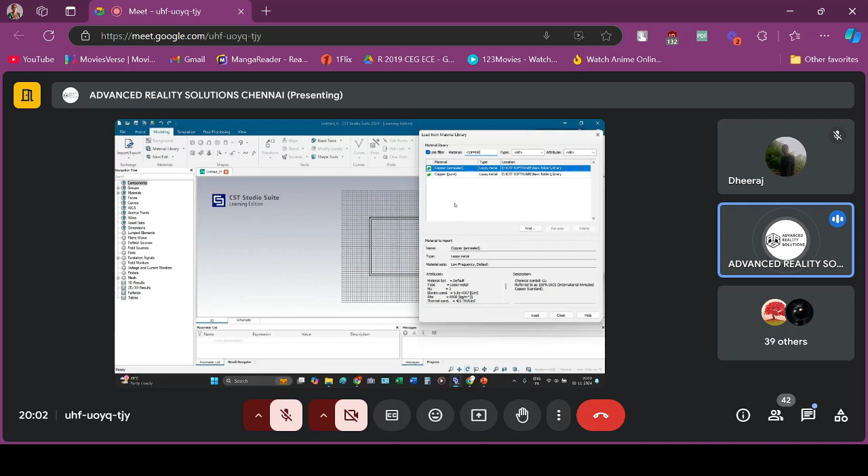See, you should justify every single value, whatever you design. Why do you select this? Why do you do this? Why do you do that? You should have justification for everything. Okay. So I select copper annealed. Once I press load, then I am good to go with this. So I will just have a preview.

You can see I have just created a ground layer. Now I will check once again. Now it's fine. So I press OK. You see a layer is formed. When I go check components on the left side, component 1 is ground. Okay.

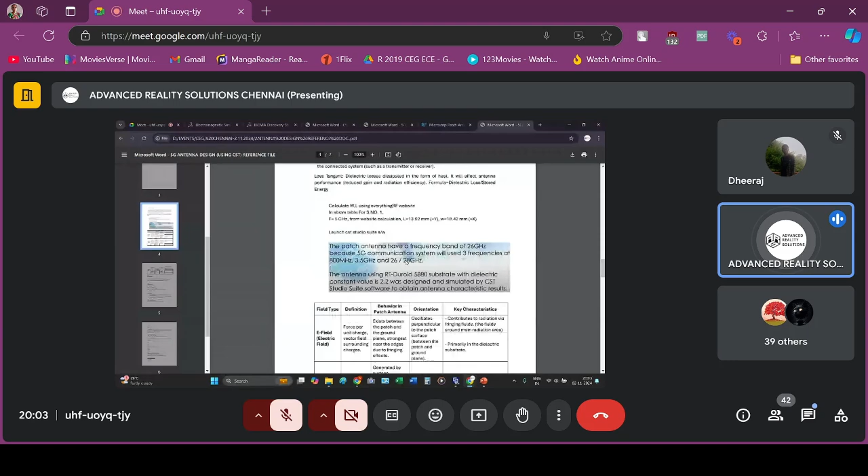Okay. So now we have 3 more steps to do, which we will continue in our next session. In our next session, I will start from the ground layer. I will tell you how to do it. Okay, from the ground layer, we will go ahead. We will relaunch this CST software and go right from here. Okay, I will teach you once again in the next class how to get started with CST Studio Suite. It's loading here. From this, we will start.

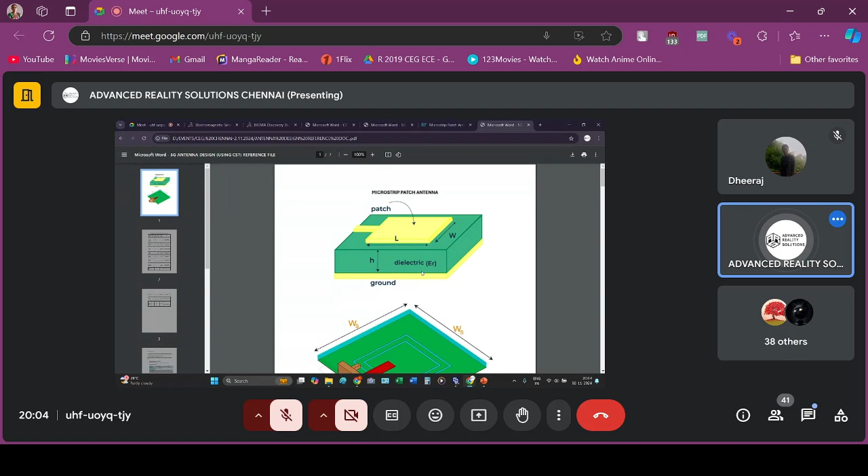And Professor, it's actually 8:05. So I am just opening the session for some questions if you have. We are ready to design the antenna. So to get the continuous flow, I'm just saving it for the next class, where we will start from the beginning. If you have any questions, please ask me.